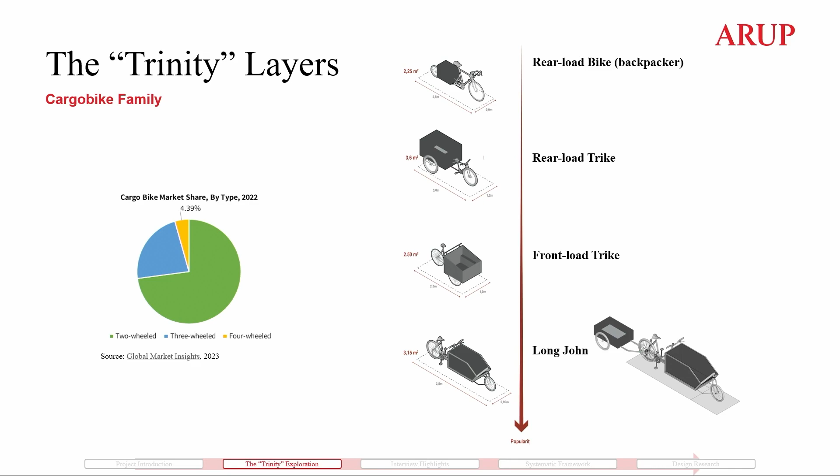However, we also see an ever-growing trend to use cargo bikes in combination with a trailer. So in our research, we take it a little bit as a separate question, given that the trailer is actually detachable. It's not in the unit, so it can also be dealt with a little bit separately in that sense. So the final analysis layer is then the area types, where we first look at the pedestrian street.

Here we try to map opportunities and challenges, of course. On the one hand, we see the opportunities of this type of street, because we have many potential clients for cargo bikes, given that there's a concentration of shops that can be using a cargo bike for their own products or using a package delivery service, for example. There's also, of course, a wide pavement. It's a spacious area.

And there's an easier transition to the pavement for the cargo bikes. However, it is a pedestrian street, so the priority is and should keep on being for the pedestrians. So bike users have to go at lower speeds or even dismount.

That is if they are also allowed in this type of area, which during business hours, we also know that on most of the streets bicycles are not allowed. And the network is therefore not really connected; this street is not really well connected to the rest of the network. So it creates a little bit of a blockage for cargo bike movement.

The second type of street is then the shopping street, where it's a lot more multimodal. Cargo bikes can cycle on the road if it's, for example, a shared space, or on the bicycle path. So it's an opportunity because it's reachable and, of course, cargo bikes can cycle faster. And similar to the pedestrian streets, you also have multiple delivery places close to each other.

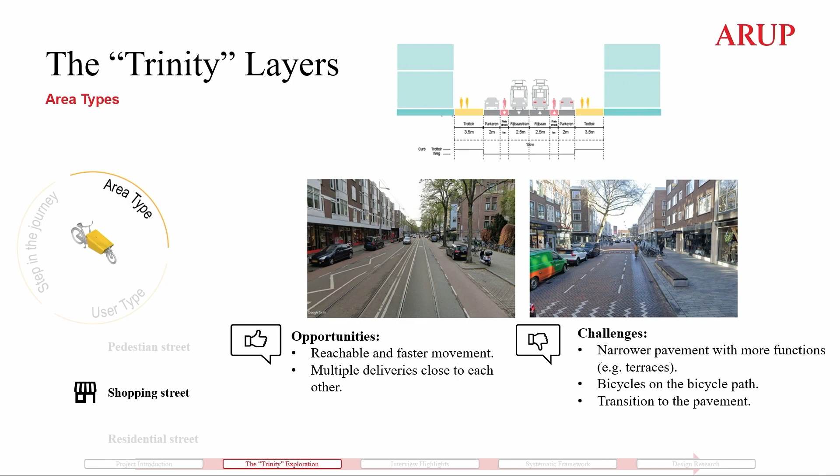However, it is also a challenge that the pavement is narrow and you also have other functions such as terraces and things like that. The road is often a bit busier. You also have other types of modalities, so public transport, cars. And the transition from the road to the pavement is also with a higher curb.

In a residential street, it's much quieter, so we see an opportunity that it also has more space, and there's a bit more flexibility in the usage of the space because of that. However, it's also a challenge because it's less connected to the urban network as well, and cargo bikes also have to do less efficient deliveries. And what I mean by that is it is not like the other places where you have a concentration of delivery points in the same area.

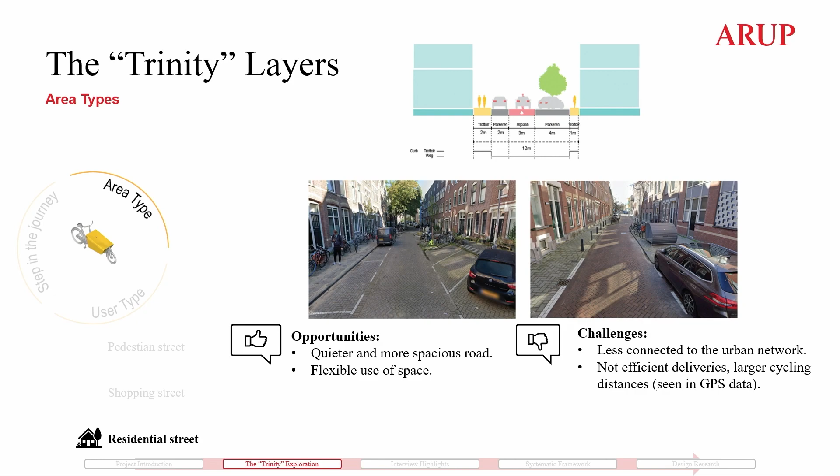So from GPS data that we collected, we could see that a cargo bike in a residential delivery area cycles, delivers in one location, then has to cycle a lot further to the next destination. So thinking about this, for example, in our design is important. How do we consider these needs to make this more efficient for them?

So, of course, we want to first draw on the opportunities that we observed and address the challenges of all these three key layers to provide a well-rounded design on how to give space for cargo bikes. So yeah, also like we mentioned before, we did a number of interviews with municipalities, users, and YOS here present. And we wanted to highlight a few things that we observed.

At least here in the Netherlands, there's also not yet a national legislation, which creates a little bit of a challenge of where are we going, how are we going to address the movement of this type of vehicle on our streets. And also because of that, and of course other reasons, municipalities are also at different stages and taking different approaches on how they should provide space for cargo bikes.

So here we can think of Groningen, where the city center is mainly a shared space. It has a completely different usage of space and how this space is separated, if we compare it to Rotterdam, for example. Everyone, however, mentioned the importance of providing safety, traffic safety, and easier and more organized movement in this shared space and 30 kilometers per hour roads that also facilitate cargo bike movement.

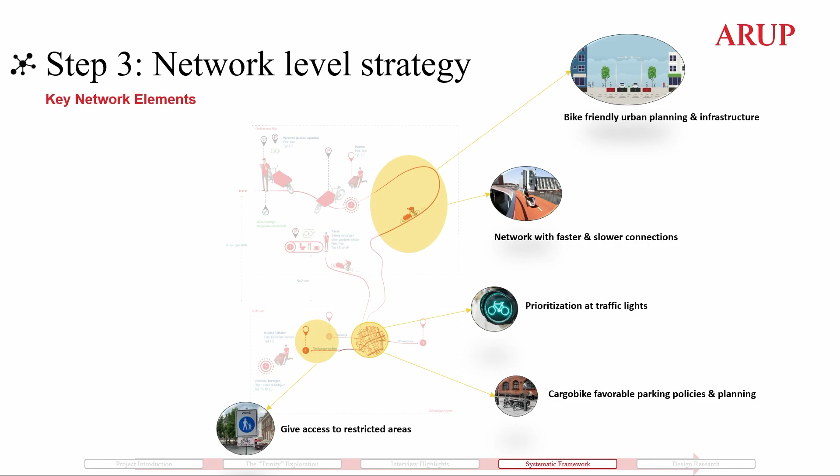The third step is looking into the network level strategy. So it's not only about parking, it's also about moving through a city. For example, for heavy truck logistics, there are already green lights implemented which prioritize heavy trucks at traffic lights. You could, as a municipality, think about these kinds of systems. How do you guide these cargo bikes through a city? Maybe some streets are more useful for cargo bikes because of the design of the street, and other streets you would like to have more pedestrian based. So look into what type of streets you want to use for cargo bikes. How do you want the traffic light prioritization? Do you give access to different areas or maybe not?

Which leads to the 4th step, which is more looking into the area and street level design. So the actual design of what a parking spot looks like. For example, Paula already named Groningen with the shared space inner city. This means that there is not really a transition between the driving cargo bike and the parked cargo bike. There is a transition in the speed, but not in the design of the street. So how do you implement this as a municipality? What are your principles for this?

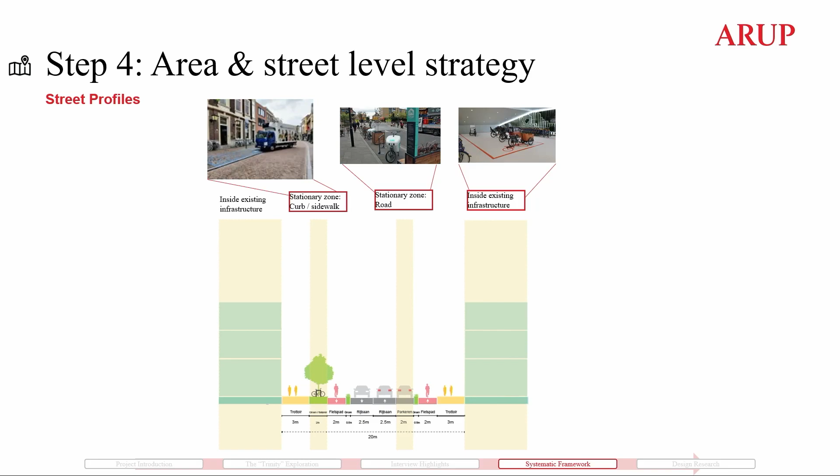And there's also an opportunity for innovative apps, for example, like we saw Coding the Curbs, in which you can rent a space on the street. And this leads to more flexible use of the street, maybe during the day by logistics, during the night by parking. Because we have small cities, we need to be flexible in our use of the streets.

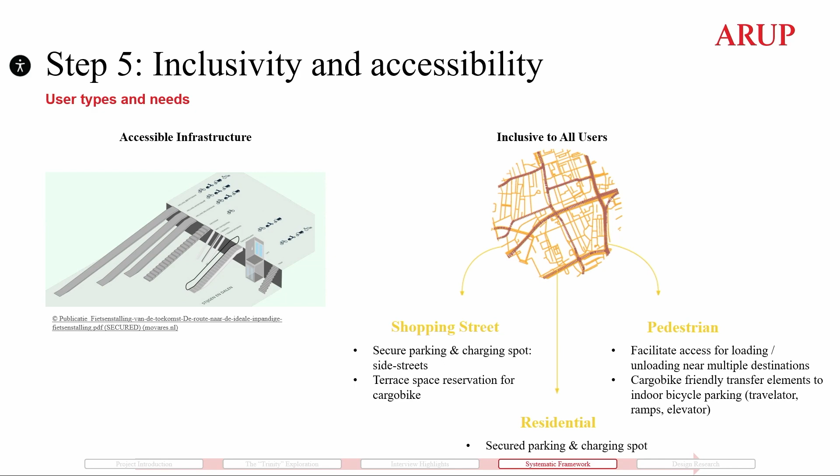The 5th step is about inclusivity and accessibility. So because there are many different sizes of cargo bikes, they may not all fit in elevators, as you see in the left figure. Or when there's a railing to get your bike up, often for a 2-wheeled bike, how does a 4-wheeled cargo bike get up there? Think about those kinds of details as well. And also the different user types. So the service provider might need a longer parking spot on the street, while the package delivery only needs loading and unloading spaces. How can you develop flexible spaces that can be used by different user types?

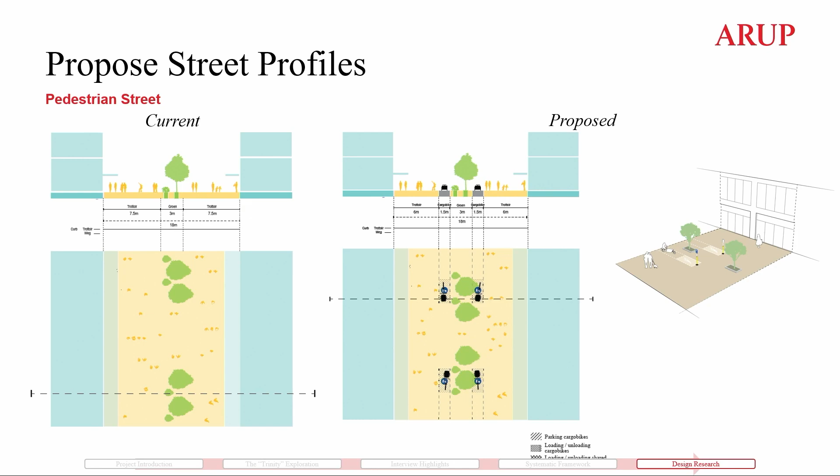Yeah, so with all of that, we try to propose a few design alternatives for how the street profile should look for cargo bike friendly environments. For each of the three area types, we consider two scenarios, but we're going to show one for each here. So starting with the pedestrian street, our goal here was, of course, to maintain the prioritization for pedestrians, create minimal blockage, but also facilitate the usage of cargo bikes in this area, given that it's also a high potential market area.

So what we thought of was to provide access to cargo bikes only to a certain part of the street, so by the intersections, where it's also clear for pedestrians to know that that area will be used for entering and exiting cargo bikes, only for loading and unloading as well, so that these don't occupy space for longer there, and making use of the already existing stationary zones, so where there are trees, where there are benches.

So there is already a space there that is not used for flow. Can we make use of that better for cargo bikes? Also, what we thought about here was to create less of a blockage of this type of streets for cargo bikes in this case. And then parking or loading, charging should be done, for example, inside bicycle parking facilities or at back streets or even inside shops, which then should, of course, be accessible for cargo bikes.

The second type of street, which is the shopping street, our goal was to create this flexibility that was mentioned many times because of this transition with the vans as well. So in this type of areas, we expect both movements still for quite some time, which in the end leads to this idea of creating a flexible environment where you also have a high turnover. So mostly loading and unloading zones in this space.

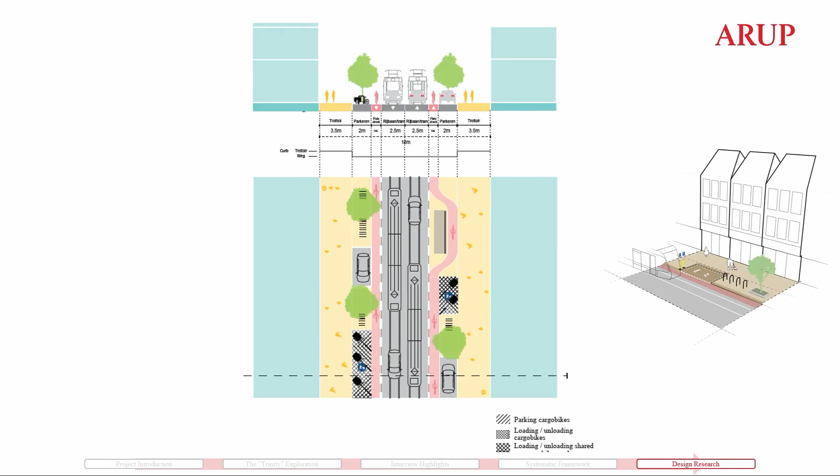Here we also think of removing some space for cars. We also see that there's quite a lot of space reserved for cars. And if we need more space, then that is where we can search for. Here also parking, we think, should be done in side streets or inside shops, for example. And in the actual space, minimal elements. So not bike racks and things like that. First, because it's a loading and unloading zone, but also to create flexibility for these different user types and sizes of bikes.

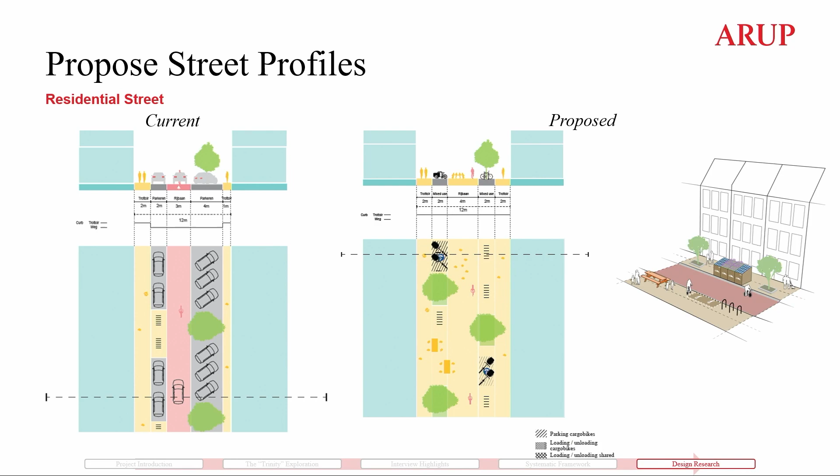So finally, for the residential street, our goal was to think about these livable environments where we can have kids playing on the streets, a nicer atmosphere for an urban area and a residential area. So what we thought here was indeed combining also the needs of these users who also need a space to park at their home, but cannot, for example, carry their cargo bike up to the third floor.

So we think about proposing only here a box to park the cargo bike with some greenery, and solar panels can also be used then to charge the cargo bike. So this would be, of course, for residents, but in addition open space for, for example, service providers and people that will not park there every day, but that will also need some space to stay there for a prolonged period.

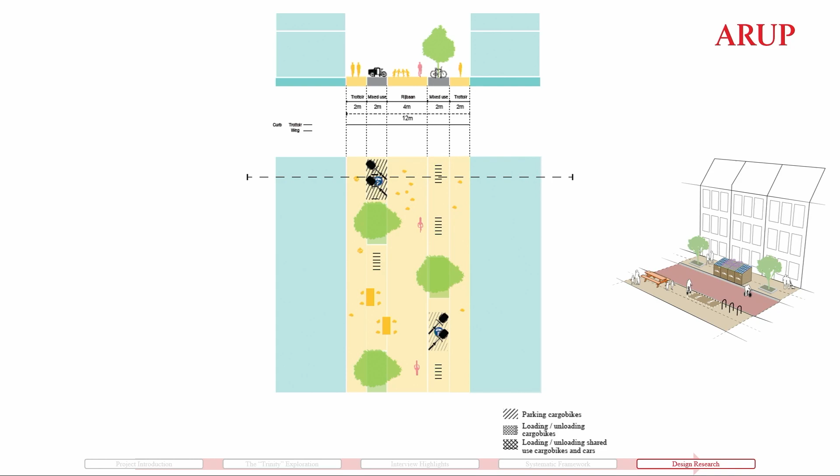Yeah, so the designs are more elaborated in the publication that will be happening next month this year. After this project, we will have a more international look into this cargo bike field, where we will try to look into the different urban fabrics. ARUP is an international office, so we have our colleagues in New York and Sydney and London. We will have a work session on how we can look into these different urban fabrics and the use of cargo bikes, and what we also can learn from the Netherlands.

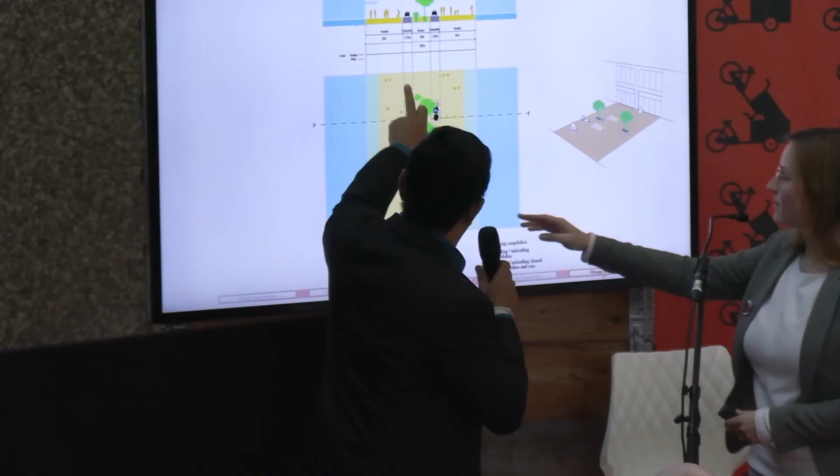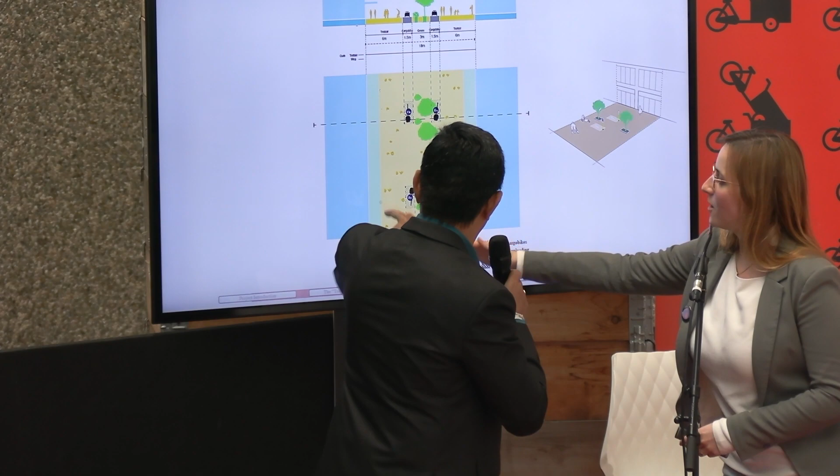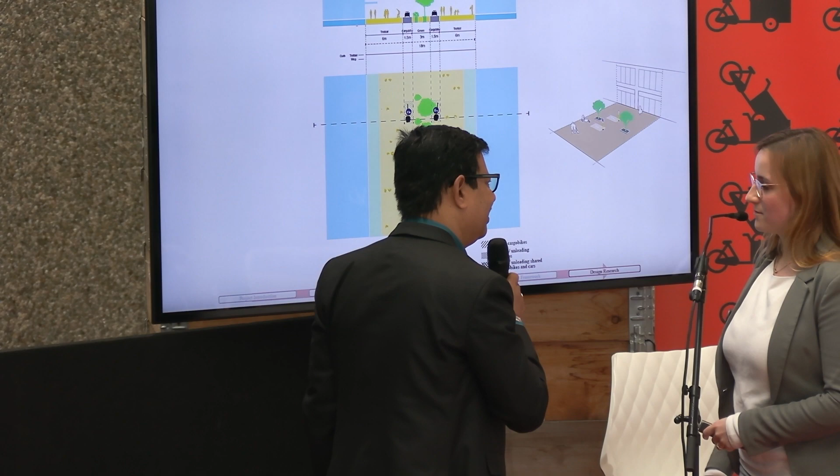May I ask here? See, this is very interesting. This is the lane where you are suggesting the cargo bike go, right? Move on this and on this, right? Yeah, so here they enter and exit, so they don't cycle through. So where will they cycle? They cycle, enter, stop, deliver. So if you don't have a road here, you have only a straight road like this. The long road is only this one, and there are lanes here, which are generally pedestrian lanes. Okay. See, on this, you expect the cargo bike to move like this, isn't it?

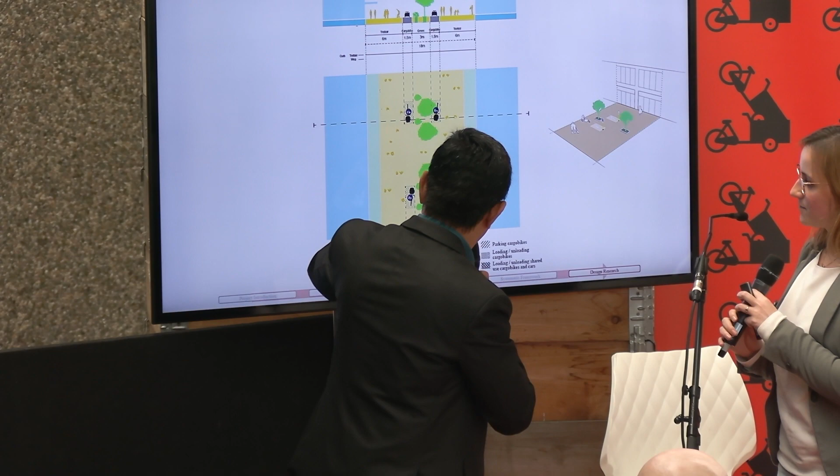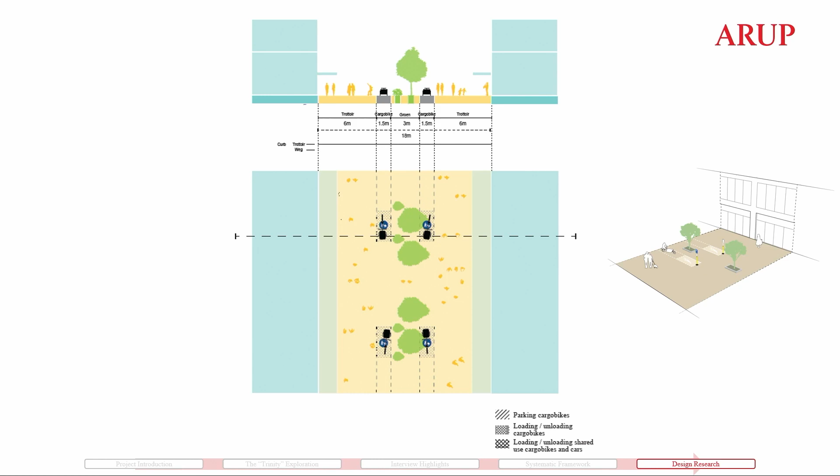And when somebody has parked here and gone to deliver here, will that not come in conflict with the movement of the cargo bike? That was my question. Just think of it. I'll think about it. Yeah, so we've made two scenarios. Scenario one is mobility hubs in the side streets, so cargo bikes are not allowed at all in this pedestrian street. In this scenario, cargo bikes are allowed to enter this area, but not go through the whole street. So they can load and unload in the spaces, and then they have to get out again. But it's not parking, and it should not fill the whole street.

And we also thought about that because a lot of these pedestrian areas have a back street, but you also have some that don't. So to make a delivery, you have to park on side streets, and it is also done by walking in the end. So providing this a little bit closer to the destination just makes it more efficient without significantly obstructing the pedestrian flows, in our opinion. It's still a pedestrian area, but with a waiver for cargo bikes. So in exceptions, they can enter.